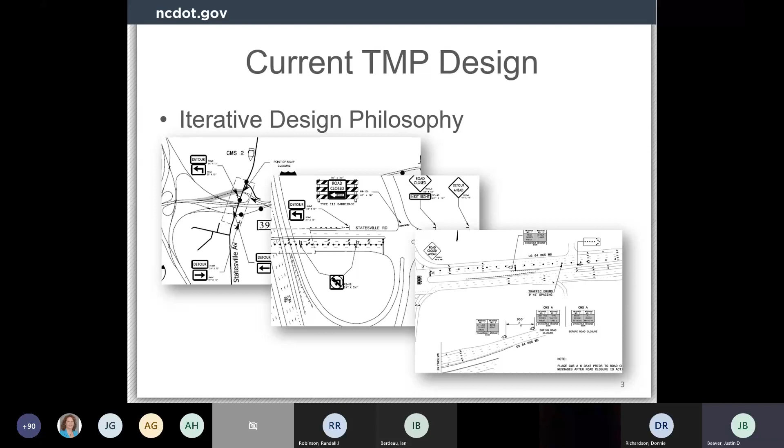And that's kind of where we're going into with this rollout. We're looking at staying more on the 2D side for now, and as we get better with the 3D, start expanding our horizons in terms of developing 3D line styles and 3D terrains.

TMP plans consist of multiple phases, and it's really unrealistic to expect designers to develop models for each individual phase. I want to reiterate, TMP plans are there to tell the contractor how to maintain traffic, not how to build the project. We give them areas to work in, but we don't specify their sequencing directly.

Finally, let's talk about weighing model accuracy versus time efficiency. I've dabbled a little bit into roadway design back a few years ago, when they started releasing 3D terrains, and you can spend an awful lot of time making that model absolutely perfect. Then you have to ask yourself, what's the benefit if your deliverables are still cross-section sheets? As we develop more models and get better with the software, and the software is able to handle our 2D to 3D conversions better, this might change.

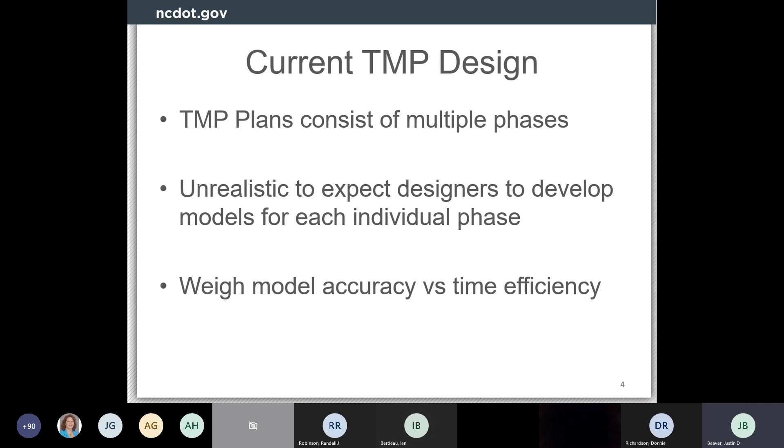To talk quickly about what 2D versus 3D plans may look like, ORD is kind of like this whole push for 3D. You make it in 2D, it converts it automatically to 3D. It's not quite apples to apples. I'm sure there's a lot of frustrations a lot of people have experienced. I know roadway experienced a lot of issues with simply cutting or shooting cross sections recently.

This slide is just to calm any fears people may have about learning something brand new and developing these complex 3D models for traffic control plans. We're not quite there yet. For the most part, for work zone traffic control and TMP plan deliverables, we're not expecting much different than what you currently deliver. It's just a different interface with a ribbon. We're still doing 2D plan development, there's still 2D plan deliverables. Once you get more comfortable with the software, there are other things you can do, especially on more complex projects, to either help with visualization or help with seeing how a culvert's constructed, things of that nature.

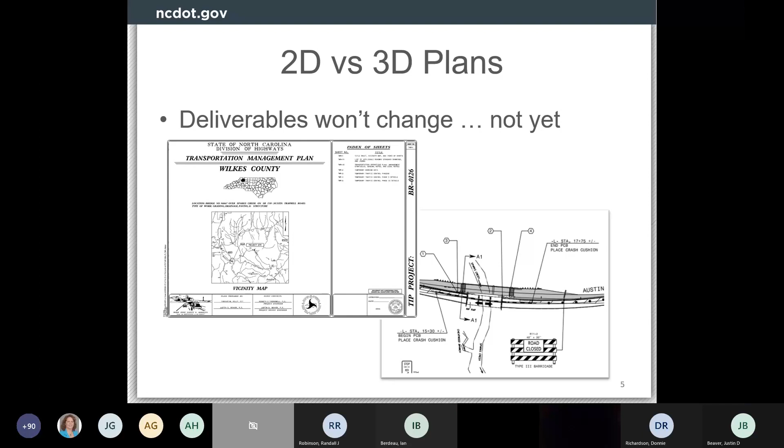So just to show what these 3D conversions from 2D line styles may look like, this is a quick snippet I took off one of the Bentley training videos. You can see most of the design happens in the top left there with the terrain model, and they're just drawing a drum line style across a 2D terrain. It's automatically attaching to the proposed terrain, showing the spacing of the cones on the right and even the barrier on the left. This could help with visualization, especially in design build pursuits, or even help contractors understand exactly how to control traffic in very stage constructed areas.

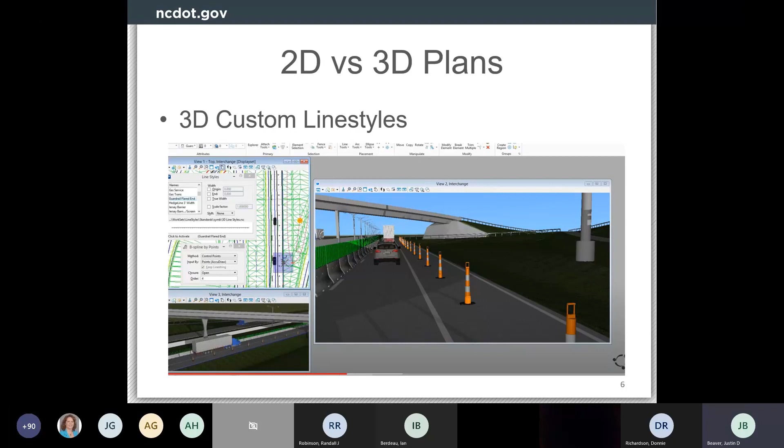So that's something we may progress forward with. It doesn't really exist now, but it can be developed in the future because we're not really pushing 3D as a deliverable, but it's something you can easily add in since it's just a simple association of a line with a 3D model.

Additionally, one thing ORD may allow us to do is create unique cross sections, not just the ones roadway gives us. Since we have access to the entire terrain model, we can easily cut a cross section across their terrain model and see how it looks in terms of our traffic control. This isn't always going to be easy, since most of the time our cross sections are interim or phase cross sections, but there are things you can do to show how the proposed lines up with the existing across a certain line. So there's some benefit to having a full terrain and not just relying on cross sections that roadway gives us and interpolating in between.

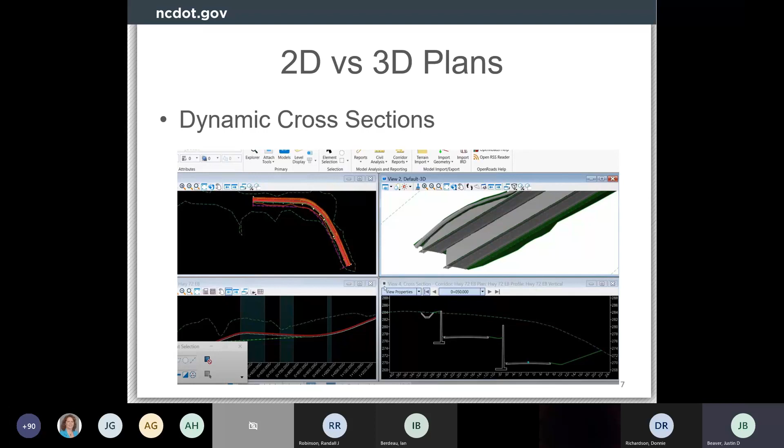Finally, drainage. I talked about doing some complicated stage culvert construction, when you have a lot of elevation changes and need to shift traffic left and right. This is another quick image I took off one of their training videos, and you can see how drainage can model their 3D structures and put them in the ground. You could imagine taking the proposed structure and the existing structure to really show a contractor how they need to build something. Again, this isn't something we expect as a deliverable, especially with the ORD rollout. Everything can still be done in 2D, but you do have the capabilities now, since the other disciplines are providing 3D features, to pull those in and actually get your hands dirty in terms of developing good TMP plans to show how complicated stage construction situations can be.

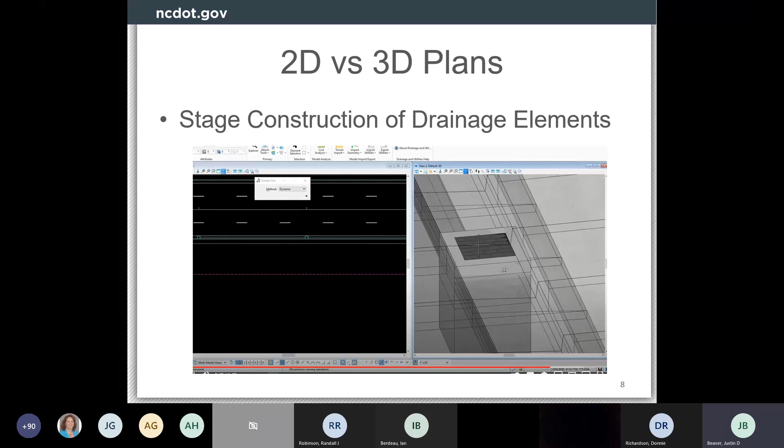So with that said, just a really quick touch on ProjectWise as a workspace. I think the push now is to put all our workspaces in ProjectWise, and that's going to be the place where you download the updated workspace. This is kind of an aside, just wanted to mention it. I think we currently use the update workspace tool, and that may still exist, I'm not entirely sure. Jeff can correct me if I'm wrong, but I do remember us talking about putting all our workspaces in ProjectWise, so it'll be updated from that interface. As with all our projects in the future, they're going to be placed in ProjectWise.

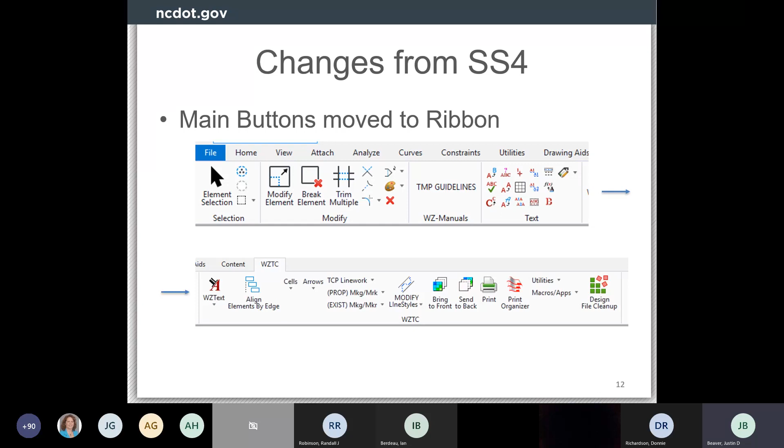So just to zoom in on what the ribbon holds currently - I actually think the TMP guidelines link is broken currently because we moved some folder structures around. But it's got your main tools that you saw before. You can see in the bottom there that you have a cells drop-down list and an arrows drop-down list. Those are directly linked to element templates now. So the same as before, you would click that and draw a drum line style, and it would drop your drums, and then you would have to specify the gap. There's the modify line styles button down there that will let you specify the gap, and just a few other quality of life things that we've added there.

And like I said, we've got more room obviously, and if there's things that we don't use we would take out, and things that we feel should be added, we can always add those in. Most of these, I think, are based off MDL inputs. So it's as simple as adding a button and typing the MDL input for the ribbon and pushing it to live.

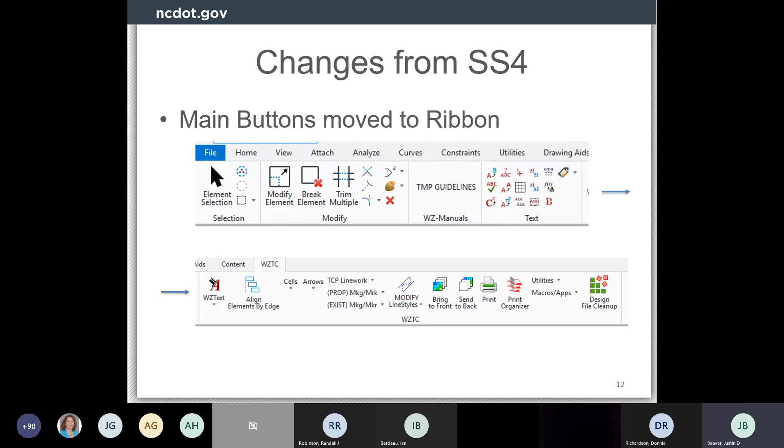So going further, to talk about some of our future plans, maybe near term, a 6 month horizon kind of looking. We've talked with Bentley about some things we can do to help improve your workflow and get you some better tools to make your plan design easier.

One of those things is using plan quantities for element templates, such as drums. We currently have one drum line style, and you can specify a gap on that drum line style. We're talking about making maybe multiple ones so that when you run a plan quantities, you can specify the gap in those plan quantities. So you might have drum line style 1, 2, and 3, each with a different spacing based on the miles per hour. That way you don't have to go calculate all the linear feet and do the math yourself - you can just type in a gap spacing for each line style, and it'll spit out a number that you can use in your quantities.

This is in addition to potentially using item types for signs, specifically cells. We can attach cells to item types inside ORD so that when you run your plan quantities, it knows that if you drop this W91 cell, it's 16 square feet. So it can spit out a quantity number that says temporary signs, or the square footage of your temporary signs is 16 square feet, and add all those cells up.

This should be double checked for accuracy, but it'll give you a good starting point and a back check in terms of finding out if your quantities are in the right ballpark. So that's something more we could potentially do going forward in the next 6 months or so.

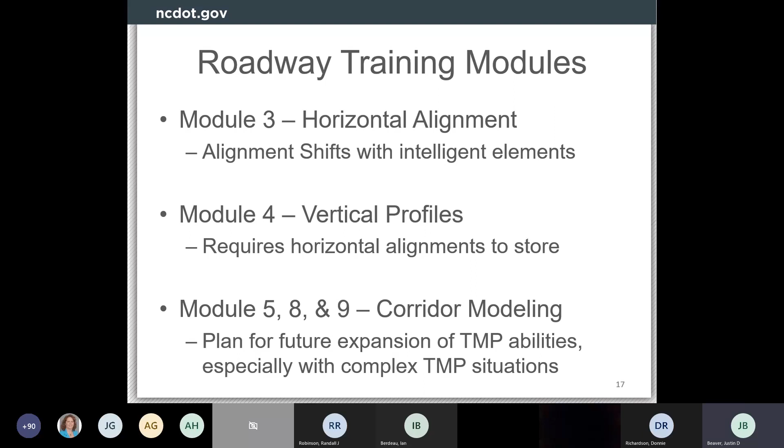Modules 5, 8, and 9 are your corridor modeling utilities. While not specifically useful currently with our deliverable requirements for TMP plans, moving forward it's something good to learn in terms of being able to maximize ORD for what it can do.

Finally, plan geometry, which talks about 3D line styles - this is module 6, with feature definitions being the big thing: feature definitions and element templates. Then module 10 is sheeting, which hopefully is familiar to you all - I don't think it's going to change too much the way we sheet, maybe project-wise it's going to get a bigger change on that one.

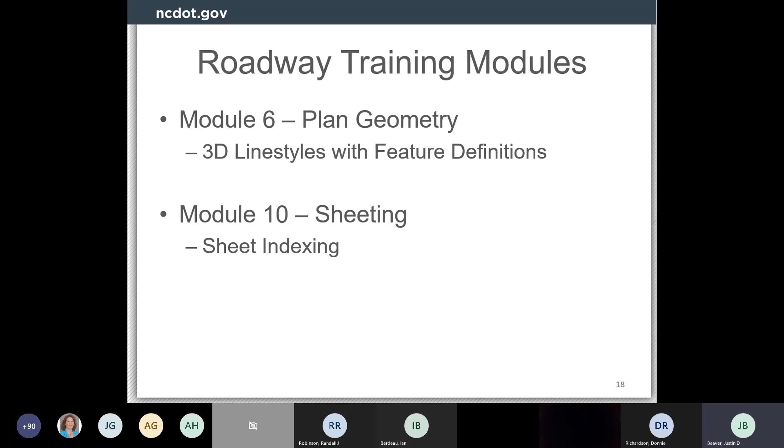So I'm going to pivot gears real quick and go through a quick exercise on ORD to show you some things - if you want to jump into it right away once you get your hands on it and bring in old files from SS4, some quick troubleshooting problems and some other things with the ribbon. Let me stop sharing the screen real quick and pull up my window.

All right, so you should see MicroStation here. This is in ORD, but what I've done is taken an existing SS4 file that we've developed in-house - this is a base map that we made. Let me turn line weights off real quick, a little bit easier to see. You can see here I've opened this in ORD straight from SS4 just to see what it looks like.

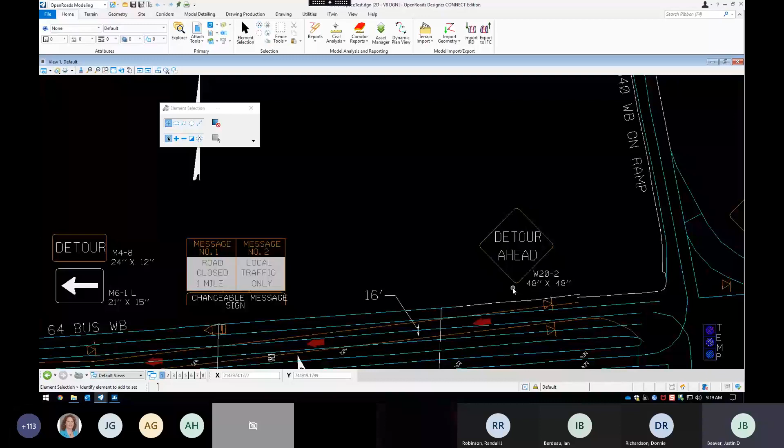And you see there's some problems here. My drums are just straight orange lines. My signs have weird text to them - they actually bleed out in some areas, you can see here they bleed out here. If you ever see this and you're wondering what's the problem, it's because you're not in a workspace.

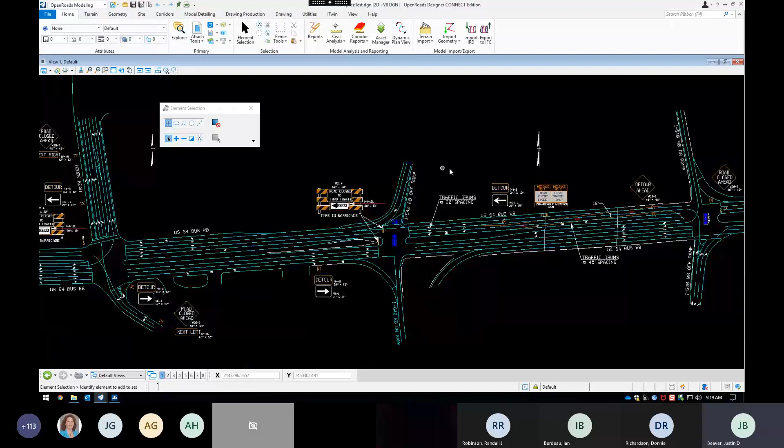And that's the number one issue that I've seen when opening existing files in ORD. There's a quick way to check that - you can just go to File, Close. Some of you may already know this, and some it might be brand new, but if you just close the file real quick, it'll actually tell you at the top here: no workspace.

So that's a quick check to make sure you're in the right workspace so you can see our line styles and have access to our ribbon. I've actually opened up another file, same file, but I've selected the right workspace. This can take some time - it takes my computer 2 to 3 minutes to fully convert and load all the line styles to give it a workspace. But you can see this is the exact same file. All the drums are showing, all the text is updated, and it looks as you would expect.

So with that said, if you look in the top left here, one thing you can check too is this drop-down list. When you're in our workspace, a lot of times it defaults to the first one here, and you won't see the ribbon. Just make sure you drop down and click on Work Zone Traffic Control, and then the ribbon should populate. This is the same screenshot you saw earlier.

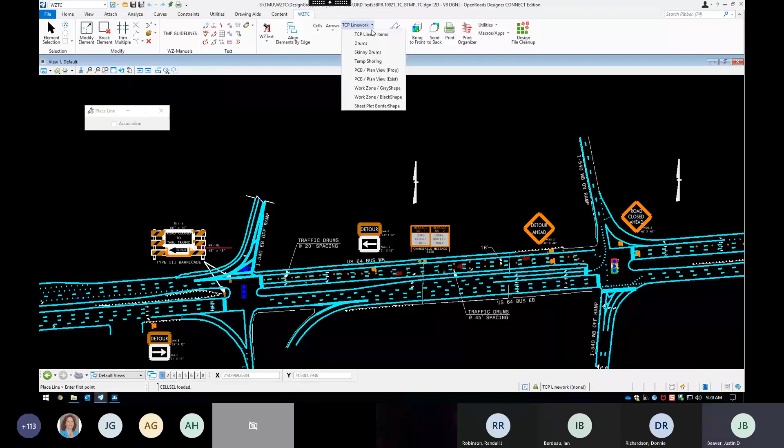There's some quick shortcuts, and you can see here's our cell libraries just like before. They still have the cell selectors as you've seen before too. Our line work is the same as well. So if you want to make drums, you can see it drops them every few feet, and you just have to come in here and modify the line style with a gap spacing. This should work as you're still working. And there you have 50-foot drums. Very basic - everything is supposed to be put on this ribbon.

As you can see, we have plenty of space here to add more buttons, and we can take some of these buttons away that we might not use. So I am all ears to private consultants if you guys have some improvements you want to add to this ribbon.

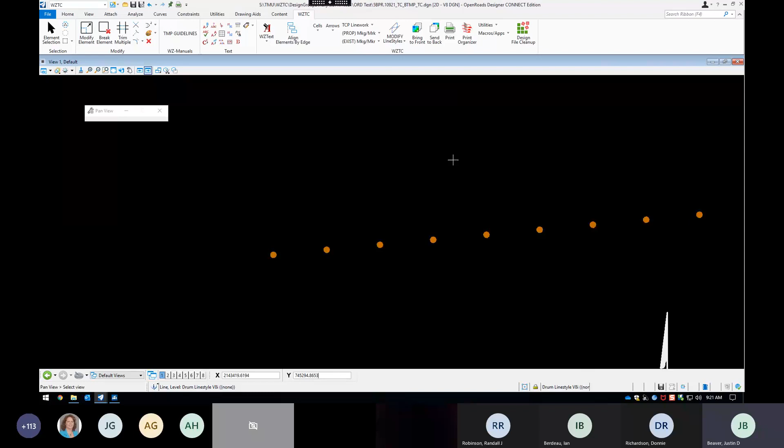And finally, one thing I want to add that's not directly related to ORD, but since I was in MicroStation, I wanted to mention it - some future things you can expect. I know this is a big sticking point for a lot of you: these bike ped cells that we've added. That's not accurate.

I think I'm still in the wrong line style. Just to show you, this is the drum line style - that's why I did that, because I'm still in the drum element template. So let me go back to TCP line work.

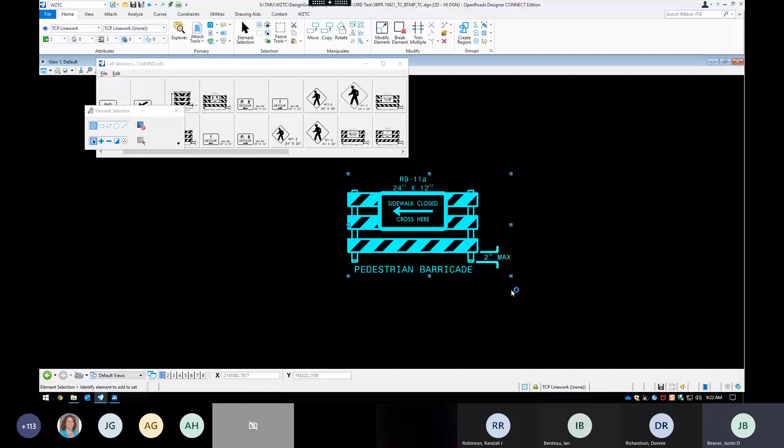You can see here, one thing we are going to do in the near future is update this cell library for the pedestrian facilities and not make this look like a type 3 barricade. I know that's a big issue we see on most of our projects - contractors using type 3 barricades when those are not ADA compliant. So one thing we'll probably do is remove this center rail, squish it a little bit to make it look more like 6 feet instead of 8. So you can look forward to that too.

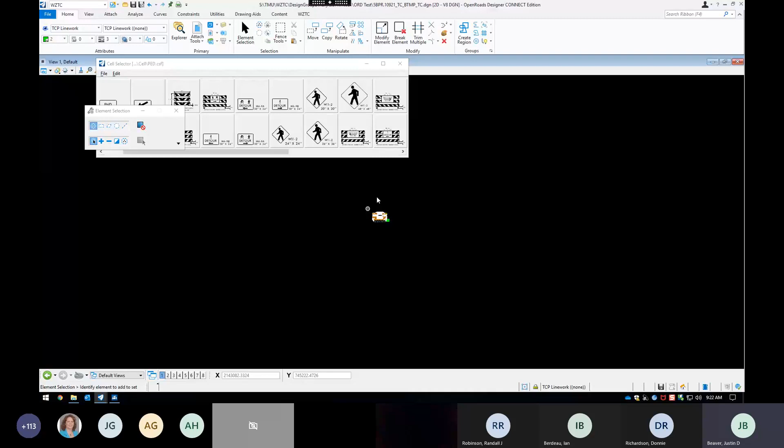I wanted to mention that while I was here, just so the private industry knows something that's coming down the pipeline to make your job easier in designing sidewalk improvements.

So that's all I wanted to show as far as this goes. Like I said, once you get in this, make sure you're in our workspace, make sure you have a ribbon, and you can just go through the work zone traffic control buttons here and see if they work as intended. You can see all this looks very similar to what you're used to. And that's one thing about the ORD rollout for traffic control - you're doing the same thing you're used to. There's no reason to worry about it.

3D is still a ways away for traffic control because we're so iterative - the benefit's just not there yet. So like I said, once roadway gets better with it, once drainage gets better with it, and once we get better with it, then maybe we can look at something different. But contractor deliverables are still 2D plans. We're not there yet to give them 3D deliverables, and God forbid us trying to seal a 3D deliverable. I'm sure nobody wants to mess with that yet.

So let me go back to the presentation real quick, and we can...

I apologize. I think I actually hit the wrong button there.